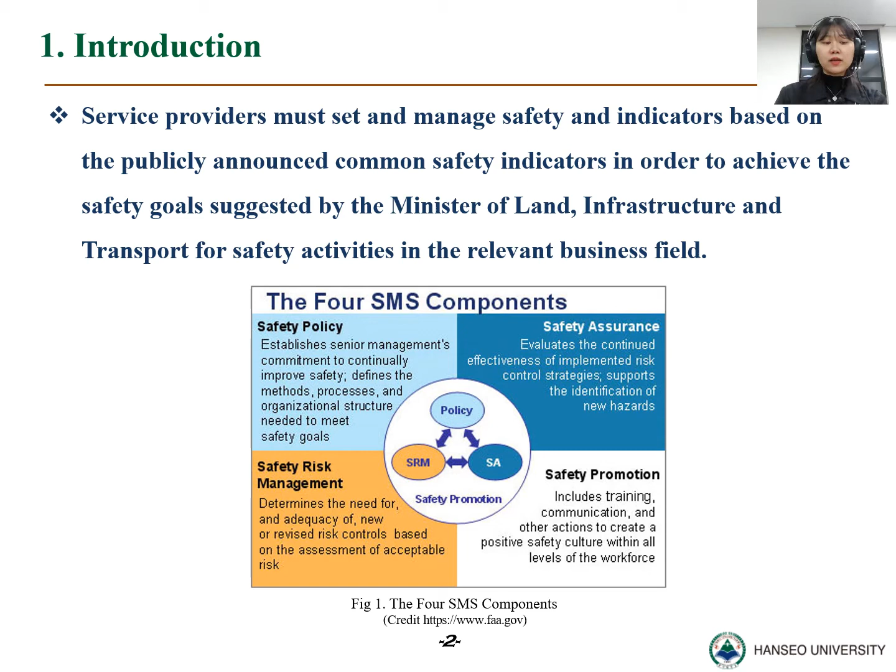However, for the safety of UAVs operated without pilots on board, research has not been conducted in Korea, including the RPAS UAV discussed in ICAO, as well as small UAVs operated within non-regulatory zones, such as identifying hazards by mission or MEL. Therefore, in order to secure operational safety of UAVs and to establish minimum safety indicators, it's necessary to establish representative mission models for UAVs, identify operating concepts and MEL for each mission model, and identify and analyze the corresponding threats and hazards.

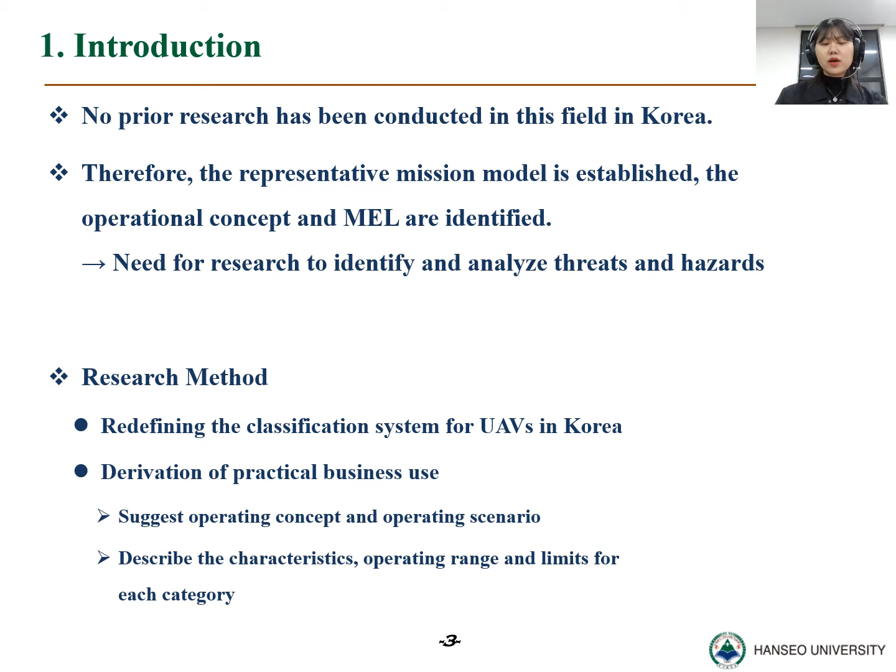For this study, it's necessary to classify UAVs according to the user's operating needs and to establish a system to determine the level of safety that is appropriate for the classification. Therefore, in this study, the UAV classification system, simplified by domestic statutes, was defined in detail to meet the global trend. The representative tests were set, including BLOS operation for UAVs that required the measurement and accumulation of quantitative safety data for safety measurement, and a standardized operation scenario was presented.

Along the research method, I will first tell you how the classification of drones and the establishment of the operating concept were conducted. Looking at Table 1, the range of UAVs that have legal effect in Korea can be divided into UAVs weighing less than 150 kilograms and more than 150 kilograms under the Aviation Safety Act. Others are classified based on 12 kg in the Drone Safety Management System in Table 2, based on whether or not a vehicle is registered and whether flight approval is required. Therefore, the classification of UAVs and drones is not clear, and it can be said that it encompasses a variety of UAVs that do not have a pilot on board.

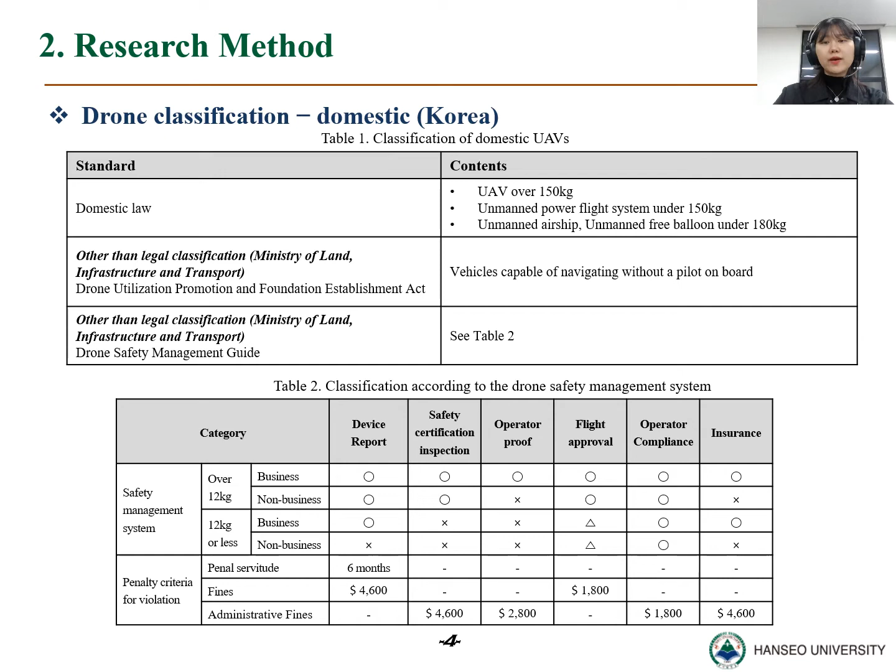Let's look at the overseas UAV classification system. The countries that can be considered as advanced drone countries are the United States, Australia, and the European Union. In the case of overseas drone advanced countries, UAVs over 150 kg are classified according to ICAO-defined RPAS type UAVs. In the case of Australia, since it was initially an act to operate small military drones, it was difficult to apply directly to the analysis and was excluded from our analysis.

Let's see America first. The classification system for drones in the United States is defined based on the FAA Pathfinder program and UAV registration program introduced in 2015. The FAA Airspace Safety Operation Policy accepts aircraft registration as much as possible, but applies the concept of aircraft operation within a certain level of safety. Under these principles, the FAA classifies airspace into low population and densely populated areas where third-party damage can be caused. Accordingly, the operation of drones began by piloting drones flying in the visible and invisible areas respectively. As a result, the U.S. classified small UAVs from 250 grams to 25 kilograms. Refer to Table 3 for detailed drone classification.

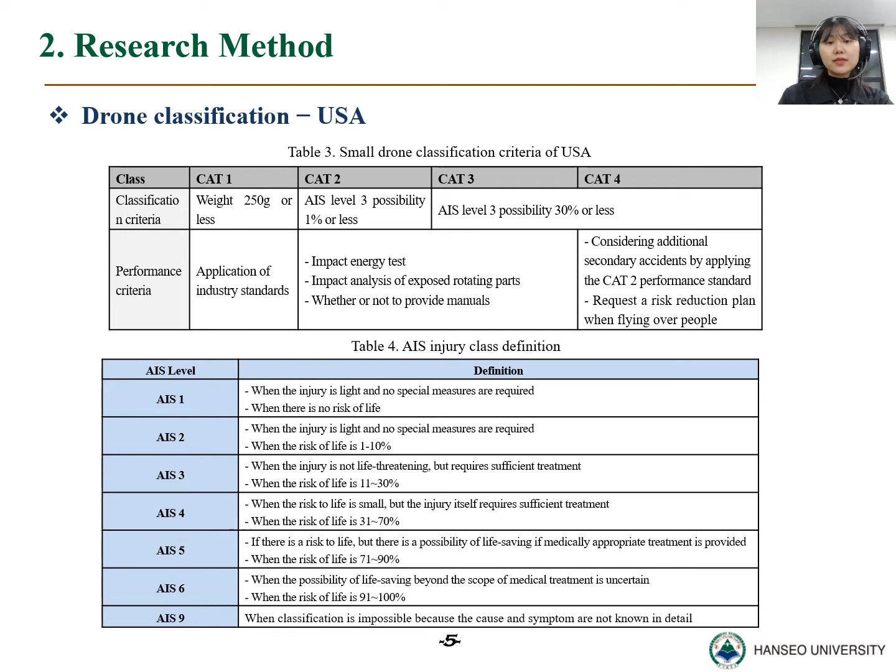The AIS Grade 3 used in Table 3 is an abbreviated injury scale based on the anatomy-based coding system proposed by the American Association for the Advancement of Automotive Medicine, and refers to the life-threatening grade representing the victim's condition in an accident. See Table 4. However, the U.S. classification system is difficult to simulate secondary damage caused by drones, and there are limitations in specifying regulation or operating limits for aircraft. Therefore, in 2016, small UAV regulations were newly established and enacted, allowing commercial activities and operation using small drones.

The European Union's drone classification was developed to apply to the protection of personal information caused by the operation of drones, compensation for damage in case of accidents, and product reliability for consumer protection. UAVs weighing more than 150 kg and less than 150 kg are classified, and based on these new regulations of the European Union's aviation, authorities are established to coordinate the details, and policies related to safe operation are being implemented. EASA's drone classification system classified small UAVs under 25 kilograms into 5 levels, from Class C0 to C4, and stipulates that each class of aircraft is registered. See the table for details.

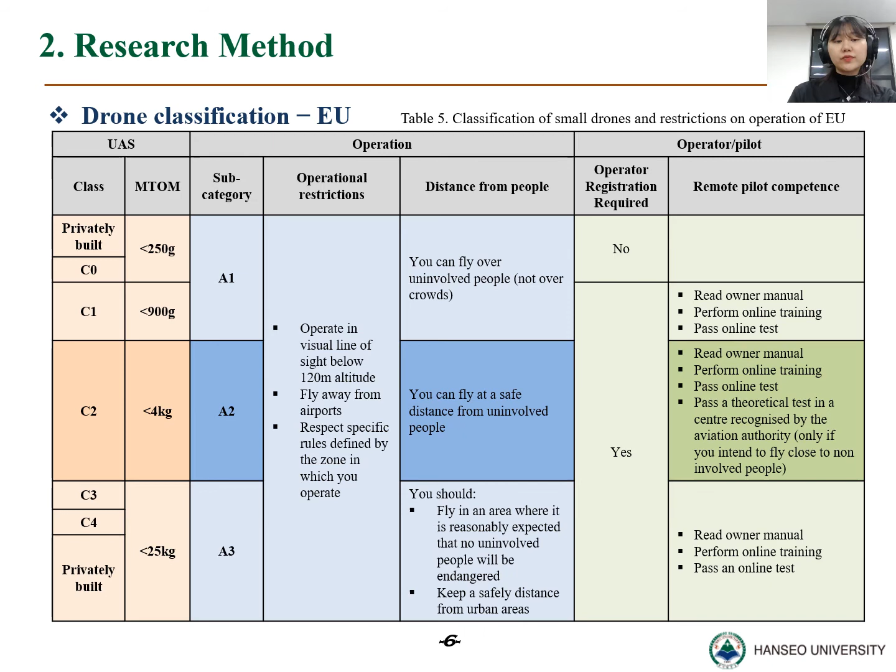At this point, it was determined that the EU is the most standardized regulation for the operation of UAVs. As shown in Table 6, the entire UAV is classified into 3 risk categories: open, specific, and certified according to operational risk. Standard operation scenarios for UAVs have been established for each category, and detailed classifications for each risk category are classified and regulated for each country. However, securing safety in drone operation is not a value that can be captured by simply specifying and regulating the limits of drone operation. The factors and risks that cause drone accidents are manifested by various factors, such as the safety of the drone design, the stability of the operator's education, and the appropriateness of the license system. The risk of damage after manifestation can also be said to have different consequences depending on the countermeasure.

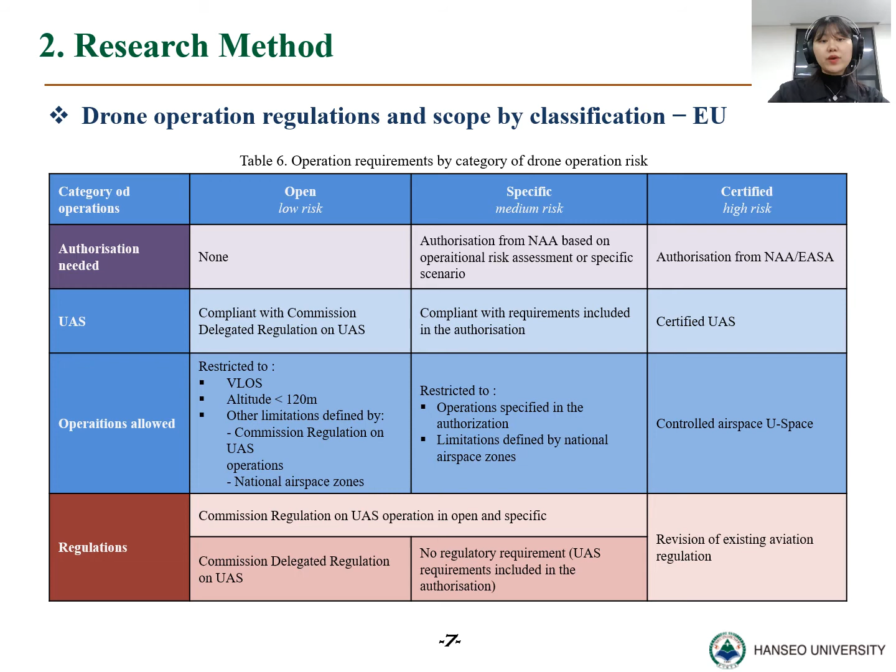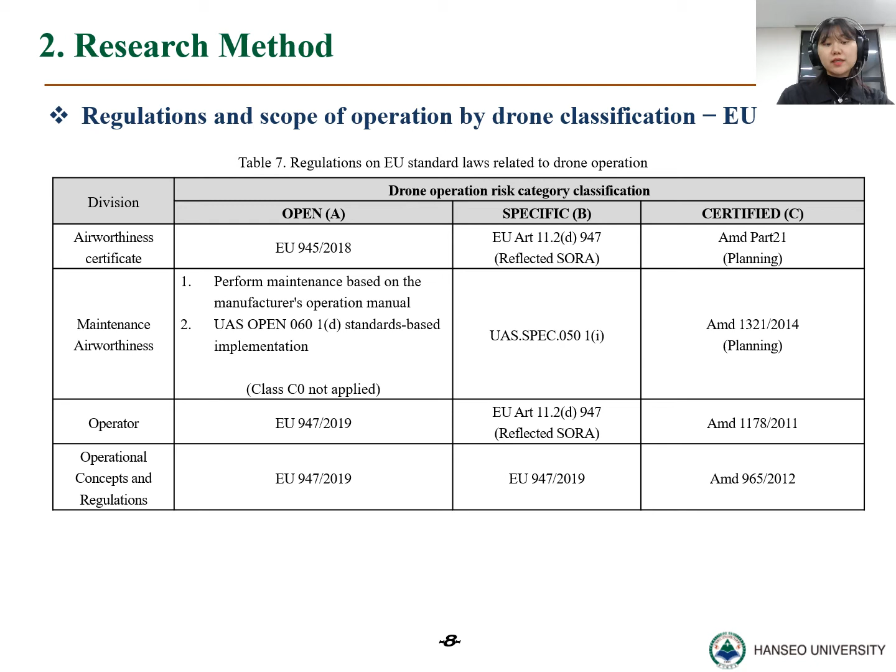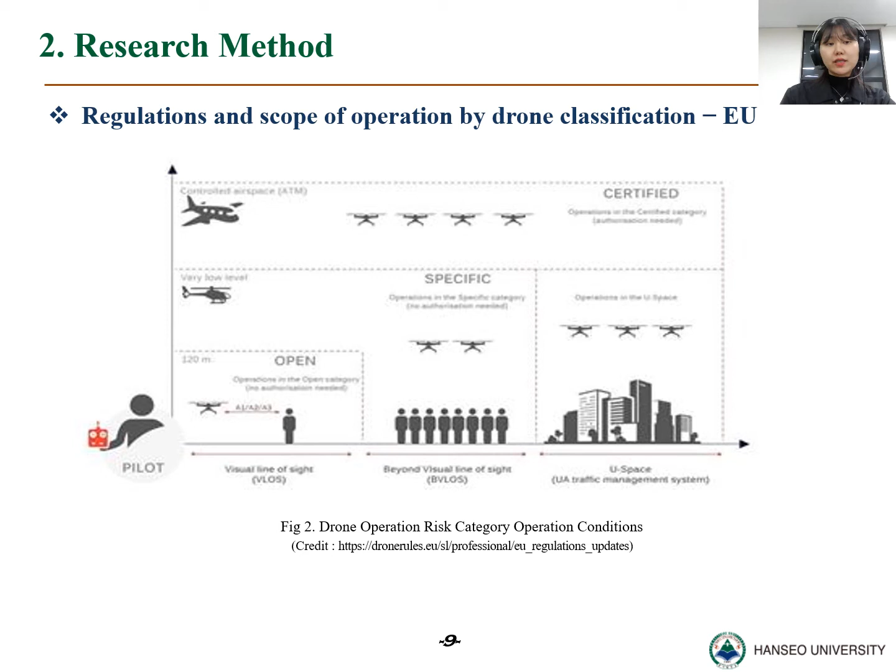Therefore, the European Union and EASA are applying regulation on drone operation as shown in Table 7 to control accidents in the operation of drones. For details, see Table 7. And the following Figure 2 summarizes the airspace usage, regulations, and operating conditions by risk category of the most commonly used drones. I will introduce the following research method.

Drone operation scenarios were derived based on the missions of drone use projects that differ greatly in the form, operating area, environment, and operating airspace of drones, and the required drone equipment configuration, airspace requirements, and operational singularities were analyzed. Three mission models were set: diagnosing facility safety, collecting evidence for violation of highway regulation, and shooting an event venue. I will tell you in turn.

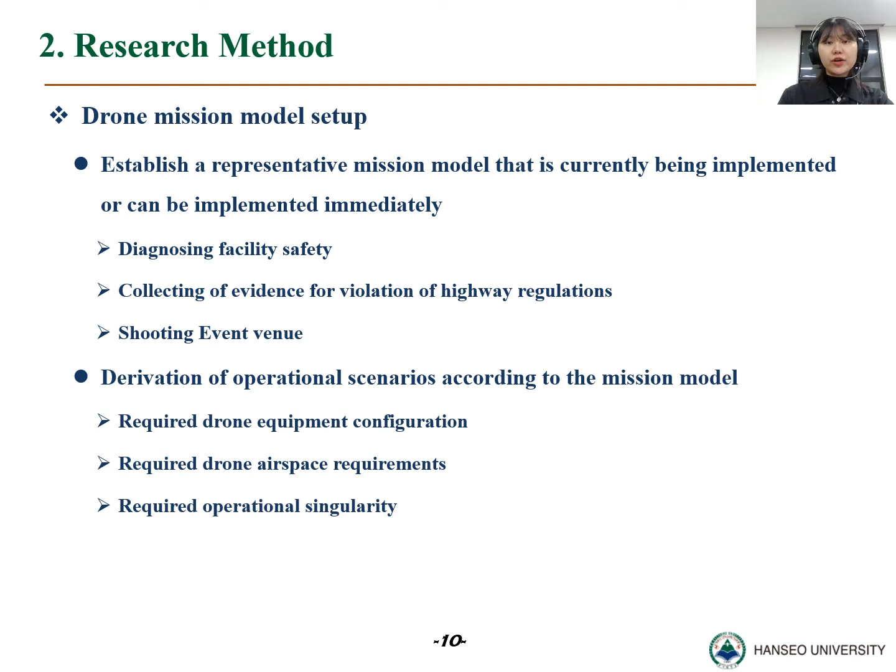This mission was defined as checking for cracks and damage of facilities using a vertical takeoff and landing drone equipped with a gimbal for posture stability. The main objects are limited to facilities such as bridges, communication towers, solar power plants, power transmission lines, and transmission towers that have few people around and can be controlled. The operating concept is as specified in the table below.

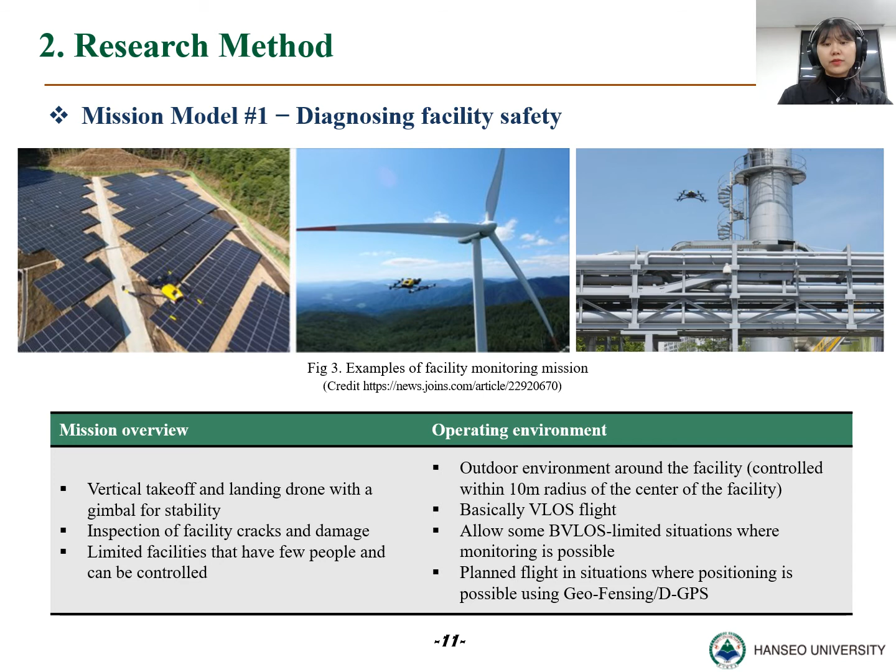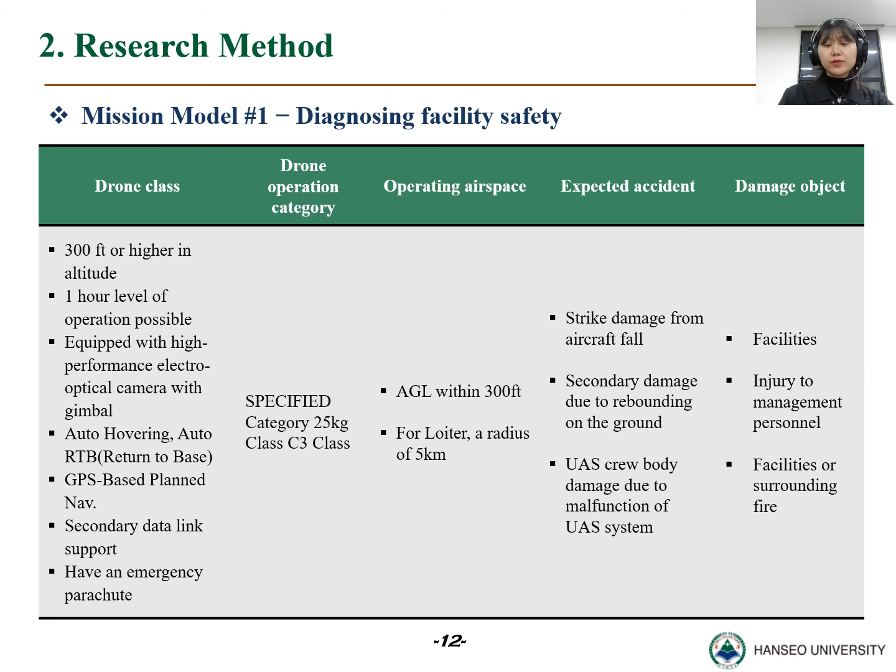Depending on the drone class, this mission assumed that a 25 kg C3 class drone with the features mentioned in the table of the specific category will be operated. The required airspace complied with the standards for non-control altitude set out in the current legislation, reporting altitudes below 400 feet and permitting more than 400 feet required by EASA's specific category drone operation. Expected accidents and damage objects are also listed in the table, so please refer to them.

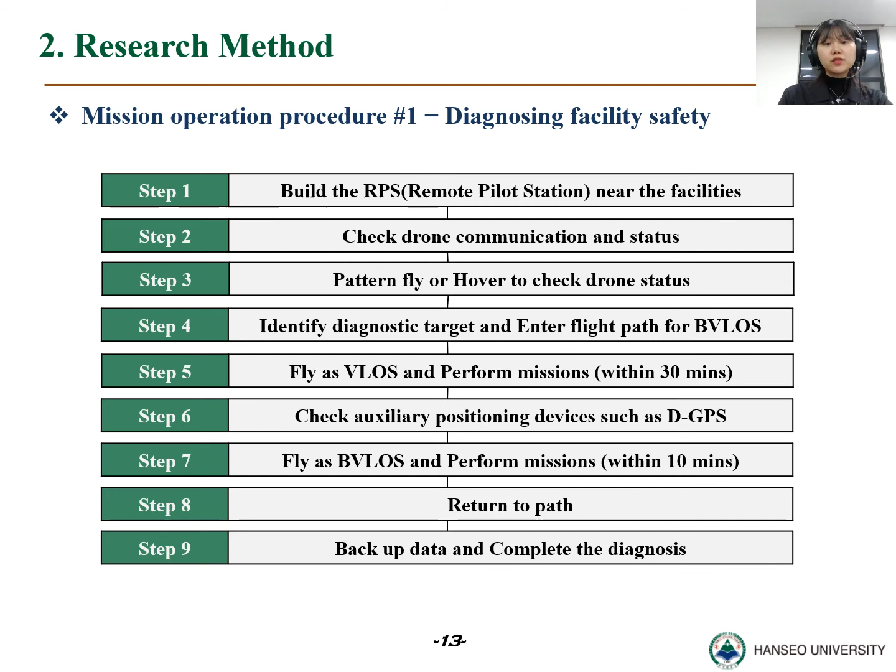The operation procedure of drones divided into VLOS and BVLOS operation is defined in 9 steps as follows. In the performance of the mission, it was assumed that the drone must be operated together by 2 or more operators with a control license.

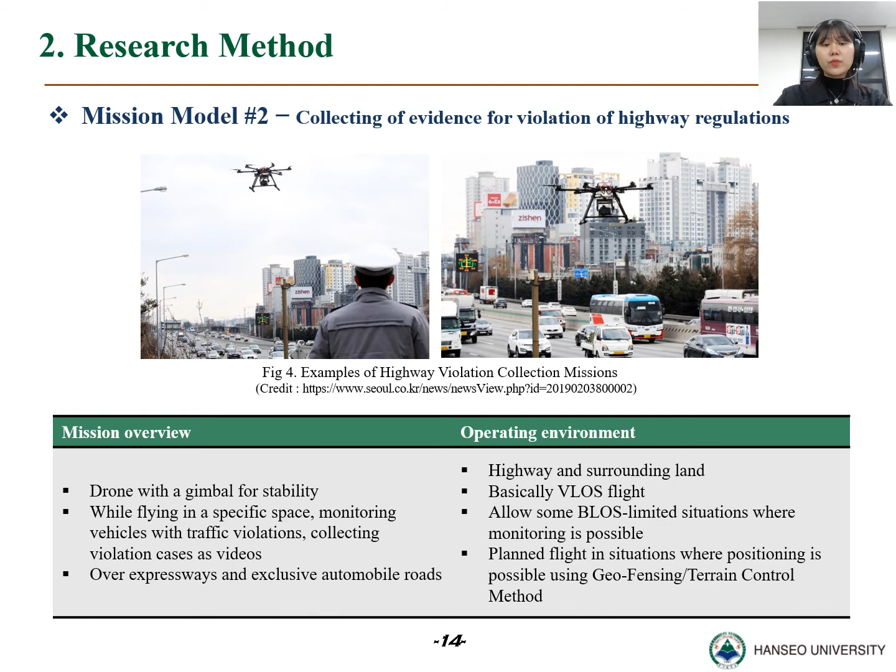This mission was defined as using a drone equipped with a posture stabilization gimbal to fly long distance in a specific space, monitor traffic violations and film violations. Refer to the table for mission performance areas, limited to areas restricted to operation due to the nature of exposure of people, such as rest areas and toll gates. Due to the nature of shooting violations, it assumes that the drone has the operating characteristic of high-speed flight of 100 km per hour level for a long time, and the drone taking off and landing on the shoulder. The operating concept is as specified in the table below.

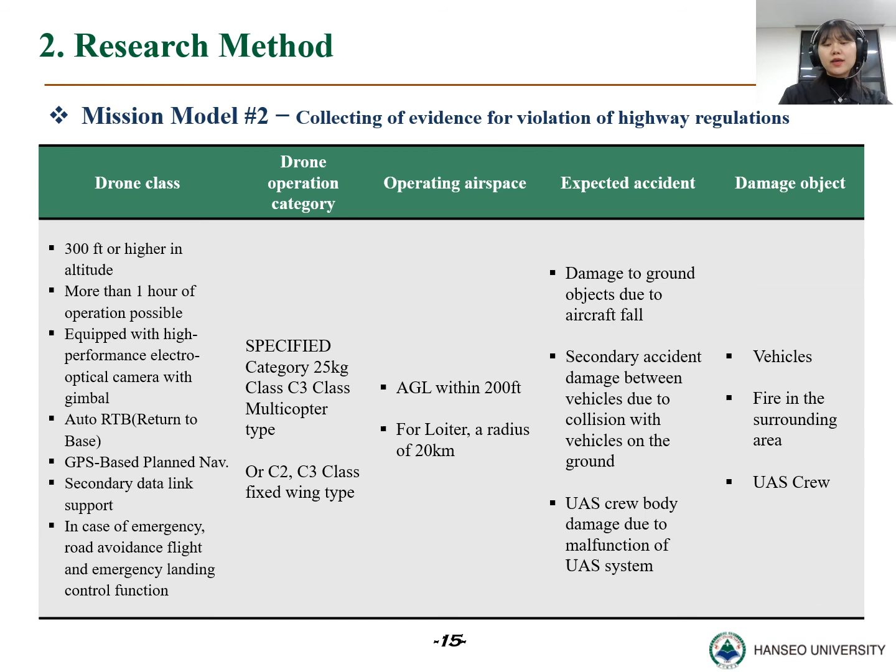Depending on the drone class, it's assumed that this mission has the operating standards of the specific category, and a 25 kg C3 class drone or C2, C3 class fixed wing drone with the functions mentioned in the table is operated. The required airspace complied with the standards for non-control altitude set out in the current legislation, reporting altitude below 400 feet and permitting more than 400 feet required by EASA's specific category drone operation. Expected accidents and damage objects are also listed in the table, so please refer to them.

The operation procedure of drones divided into VLOS and BVLOS operation types is defined in 8 steps as follows. In the performance of the missions, it was assumed that the drone must be operated together by 2 or more operators with a control license.

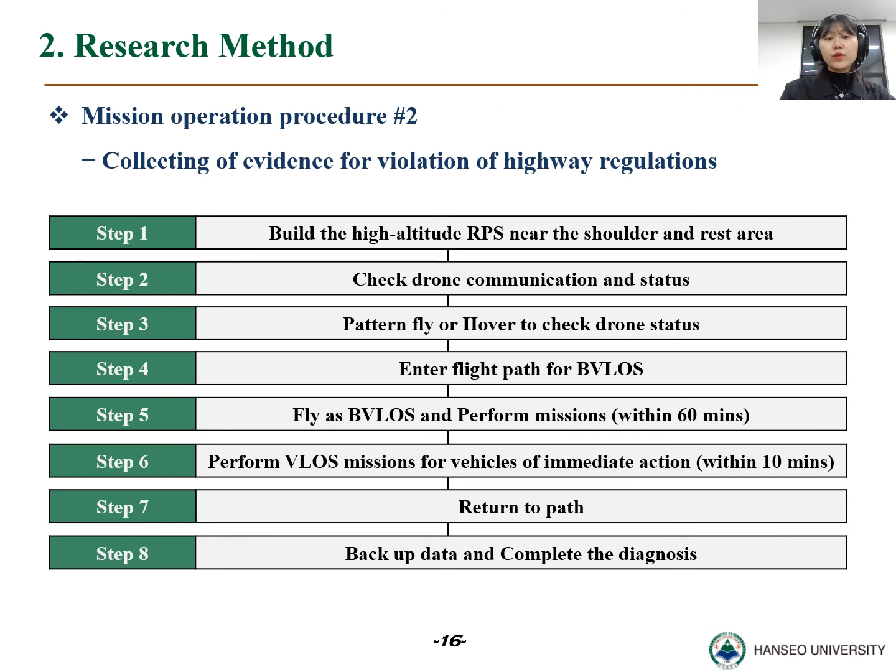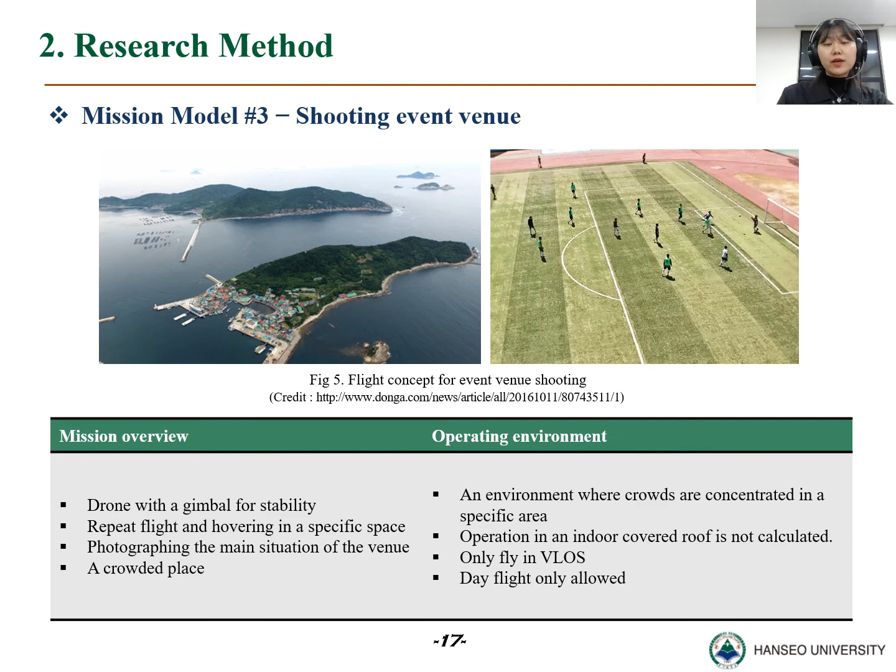In this mission, there's the special event in which the ground damaged object, as a general crowd, is not able to pay attention to the drones. So a flight method that can reduce the risk of ground damage must be defined. Drones for this mission were presented by dividing into commercial drones and personal shooting drones. Commercial shooting drones were limited to 25 kg C3 class multicopter drones with high stability because the result of shooting should have commercial value. In the case of personal drones, it's assumed that C2 class drones with the functions mentioned in the table are operated with the operating standards of the specific category.

The required airspace is assumed in consideration of the operation in densely populated areas and the prevention of accidents caused by collision with facilities. Expected accidents and damage objects are also listed in the table, so please refer to them. The operation procedure of the drone as a VLOS operation type is defined in 6 steps as follows. In the performance of the mission, it was assumed that the drone must be operated together by 2 or more operators with a control license.

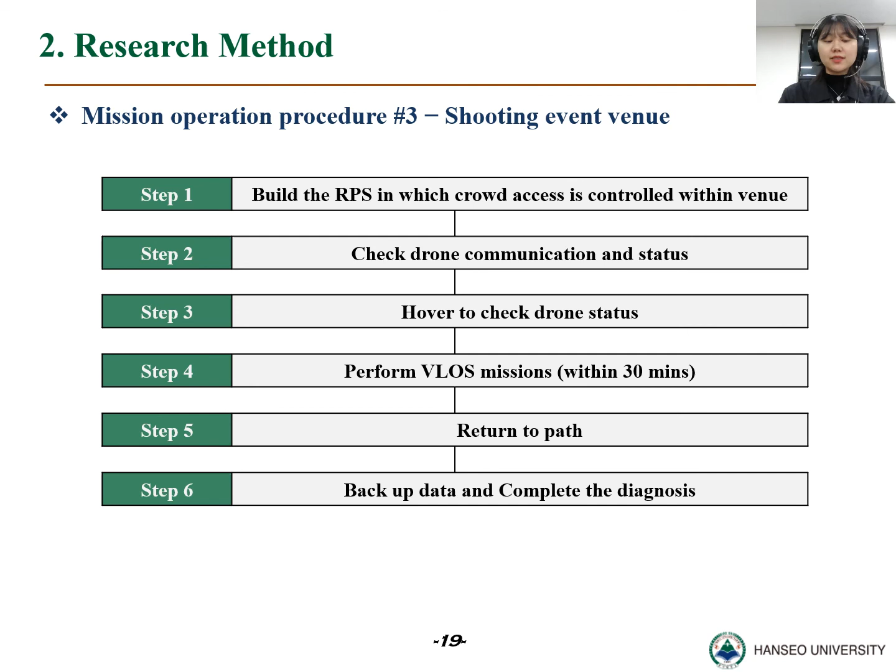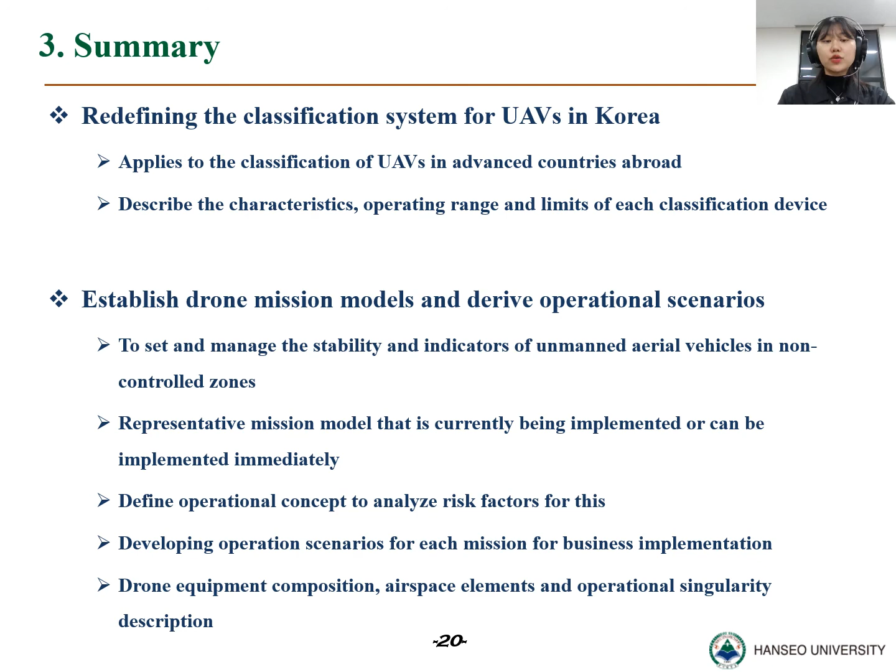In summary, in this study, the classification system of UAVs in Korea was redefined and a mission model was selected to ensure minimum safety of UAVs in uncontrolled zones. The concept of operation for this was also described. Accordingly, by deriving operational scenarios for each mission, we predict the type of accidents that could occur and the victims. In the future, as research that can be developed based on this research, there will be research to identify the types of accidents that may occur in the operation of drones according to scenarios based on the derived operational scenarios.

In addition, this operational scenario will be used to analyze the hazards that may cause the accidents identified based on the PBS of the drone system and the causes of hazards. Also, risk assessment will be conducted for each mission scenario based on the bow-tie table for each hazard notified by the Ministry of Land, Infrastructure and Transport.